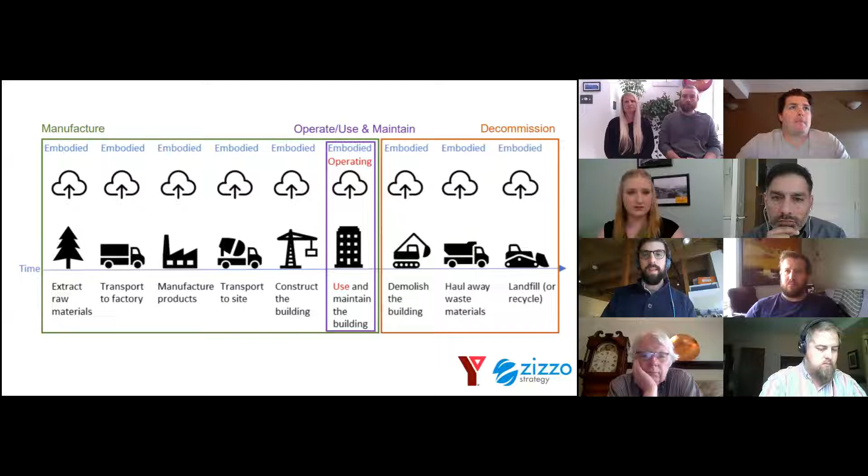And to put that more in focus, Architecture 2030, you may have seen this graph from the Embodied Carbon Network and others, found that annually embodied carbon is responsible for about 11% of global greenhouse gas emissions and 28% of the global building sector emissions. Now, that's only for new buildings, right?

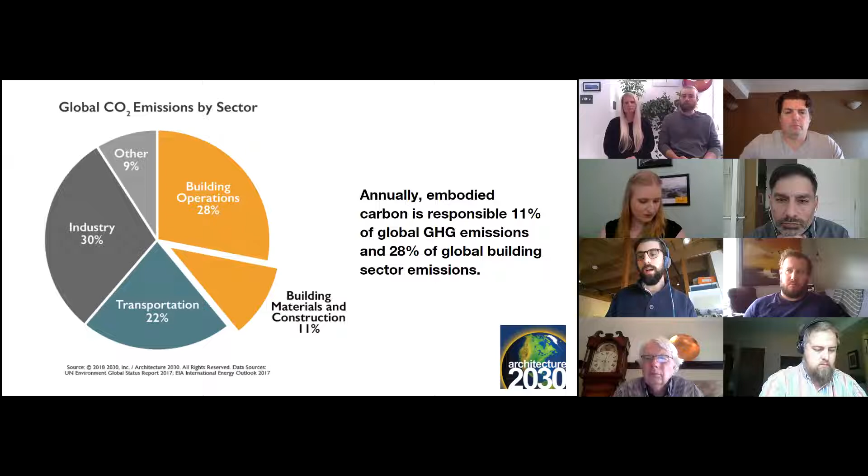If we think about the full scope of global waste emissions, and I think you'll hear more from Faisal from the City of Vancouver about that, it's a non-negligible part, right? It's not the same as stationary emissions or transportation emissions, for example, but it's meaningful and something we need to be accounting for in our emissions reduction strategies going forward.

The second piece is, of course, the materials themselves. We extract a phenomenal amount of materials from this planet, and as cities and other organizations start to think about what a so-called one planet economy looks like, living within the natural boundaries of our geophysical systems, the amount of materials we use just writ large really matters.

So Circle Economy out of Amsterdam does their annual Circularity Gap Report, and this year they found that 28.7 billion, with a B, metric tons of materials are extracted from the planet every year for construction and infrastructure. That's just an astounding amount of material, right? That's the single largest material usage by any sector in the world. And that is growing over time. So we have a clear imperative to reduce the amount of these materials if we intend to meet a variety of our social and environmental goals.

The final reason we should care is that we have an economy that's significantly implicated in construction and our buildings. And obviously this is why something like the Commission gets involved. I always like to refer to the VEC's work in the green job space. Since 2010, we've been tracking the number of green jobs in Vancouver. And we've seen that number grow 35% between 2010 and 2016, a rate far greater than pretty much any other sector outside of tech in the city.

Green buildings have always been one of the single largest, if not now the largest, pillars of that green economy. We have lots of folks in clean tech. We're a global clean tech player, but green buildings, job for job, are still one of the largest sectors. And we expect that trend to continue, particularly as we adopt more rigorous green building policies moving forward. So there's a clear economic imperative here when we're talking about our built environment.

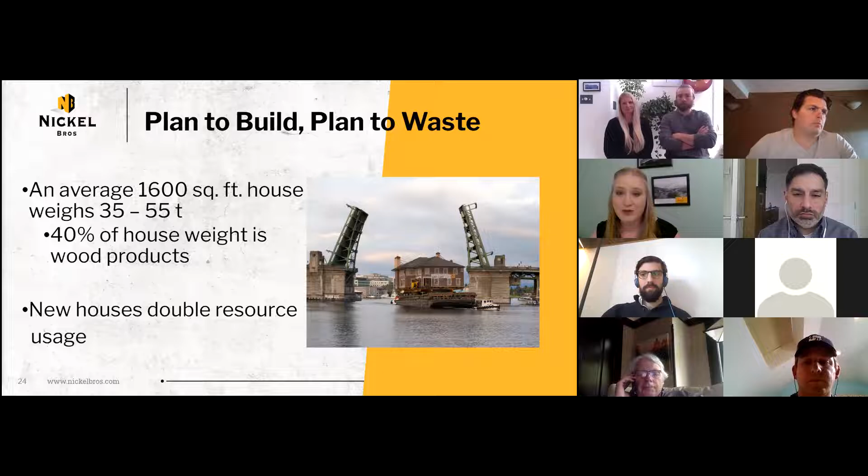People aren't always aware of the actual amount that is in each of these homes that's being torn down. About 3,000 homes were demolished in Metro Vancouver in 2018. So when you think about the amount of wood there that was just torn up and wasted, it's a lot of clean wood.

Over 60% of those homes were pre-1940s homes, so they were built using old growth wood rather than the new growth wood that we have now. And those 3,000 homes created 165,000 tons of solid waste in our landfills.

33% of our landfill waste currently is demolition waste. So 235 of those were classified as character homes, meaning some of those materials would have had to be recycled based on the municipal bylaws.

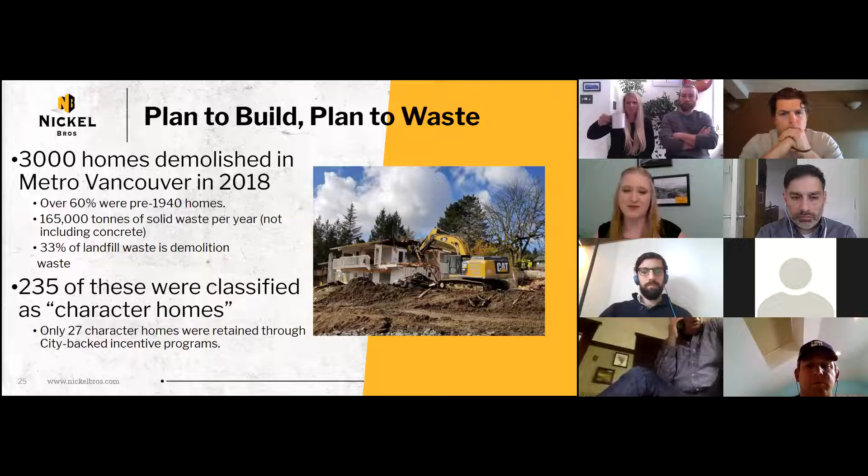One thing I find interesting is that despite all of the programs in place to save character homes and older homes, only 27 of those homes were actually retained through city-backed incentive programs. So 27 of 235 tells me that despite all the progress we're making, there really is still a very long way to go in being able to reuse these materials effectively.

About a third of those homes were actually suitable for recycling or relocation, but either we didn't get a call to recycle or relocate them, or we were brought into the process too late, which is something I'll talk about a little bit throughout today.

But if we had received the call to relocate these homes, we could have diverted 97,500 tons of waste from the landfills within 1 year, which includes 22,000 tons of clean wood. That equates to 41,800 trees that wouldn't have needed to be cut down for 1 year.

We find that a lot of homes nowadays are being deconstructed, which can be a really great option. But I think it's always important to look at the recycling hierarchy, which tells us that reuse generally should come before recycling. So when you look at a deconstruction project, deconstruction on average only reuses 20% of the materials they're able to salvage.

The others are recycled by being used for fill or other processes like that. So again, we really try to promote repurposing and reuse first and recycling last. And sometimes there are situations where we can do both.

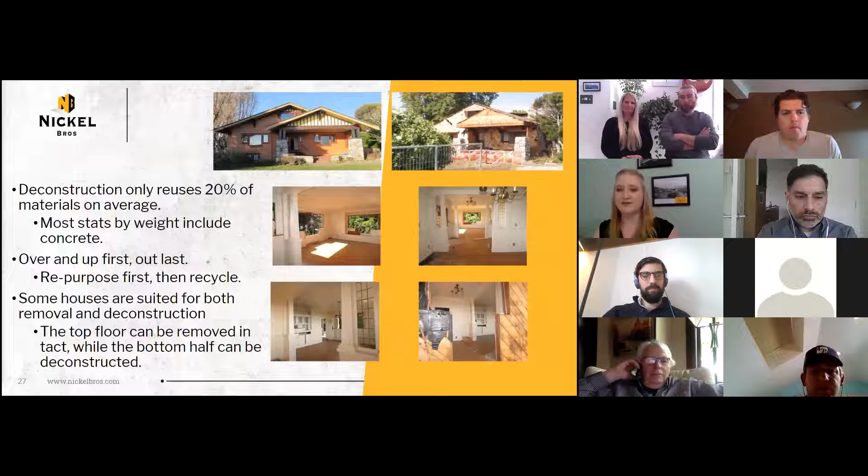For instance, in Vancouver we have trolley lines, so if it's a 2-story home, we often can't take both stories due to the height restrictions. So we work with unbuilders quite often where we'll move the top half of the home and they'll come in and deconstruct the bottom half. It's a really great collaboration within our industry to try to save as many of these materials as possible.

Just as an example, to give you a comparison between deconstruction, demolition, and home recycling, this is a home that was in Vancouver. We received a call about it in 2018, and it needed to be moved by the City of Vancouver to actually create park space - it was in the way of where they planned out their green space initiative. So that home ended up being moved to New West, and it is a rental property now.

So with that home being recycled, the total cost to recycle that home was about $8,000, and we were able to divert 93 tons of wood or construction waste from the landfill throughout that home's life cycle. By extending the lifespan of that home, we've saved roughly 200 trees, which compared to deconstruction, would have cost around $29,000 to deconstruct that home, saving 90.21 tons of diverted waste through reuse and recycling.

And then green demolition - the thing you have to keep in mind is with deconstruction and green demo, you also need to do all of your hazmat abatement. Whereas with home recycling, that quite often isn't necessary because we don't disturb the materials the same way that lifting them up and taking them out does. So for green demolition, your cost would have been around $33,000, and you'd only have diverted around 69.75 tons of waste from the landfill. So home recycling compares quite well when you think of cost and amount of waste diverted.

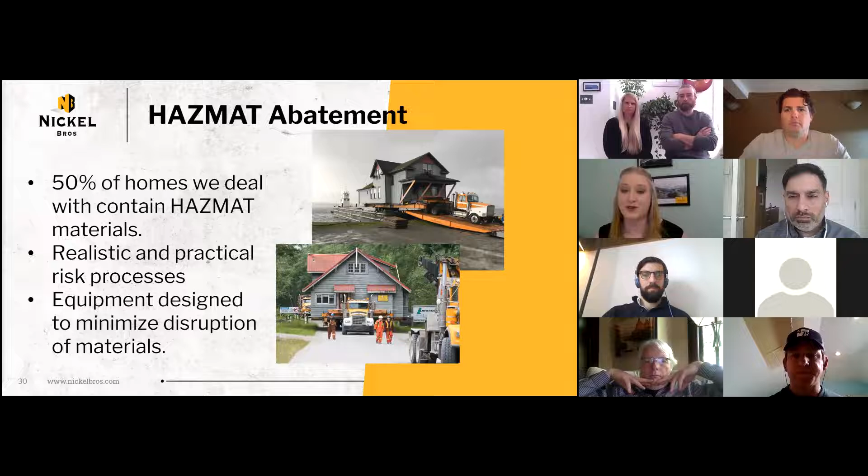So we hear a lot of talk about the circular economy lately, especially from the Ministry of Environment - that's one of their keywords right now. Home recycling is very much a circular economy solution because it does create affordable housing as well. So the average cost to build new in BC is about $200 to $500 per square foot, whereas the average cost to have a recycled home delivered and installed is about $75 to $120 per square foot. And that includes building a basement underneath it if you wanted another floor.

So currently we find a lot of our homes are actually being received into Washington State. We have a few different affordable housing organizations that we partner with there. So you can see this particular development was 12 homes that we moved into the San Juan Islands, and we have another affordable housing development with that same organization coming up.

So a lot of these homes, as I said, contain materials that we can't get anymore. We're not just looking at the value of the environmental impact that we can save through these homes, and we're not just looking at the affordability. It's also the fact that these homes in a lot of cases are - I don't want to say this to offend anyone - but in a lot of ways just more structurally sound than the homes we're building now. They're incredibly solid, they've kind of been time tested, and the materials in them that we're at risk of just throwing away are literally things that don't exist anymore.

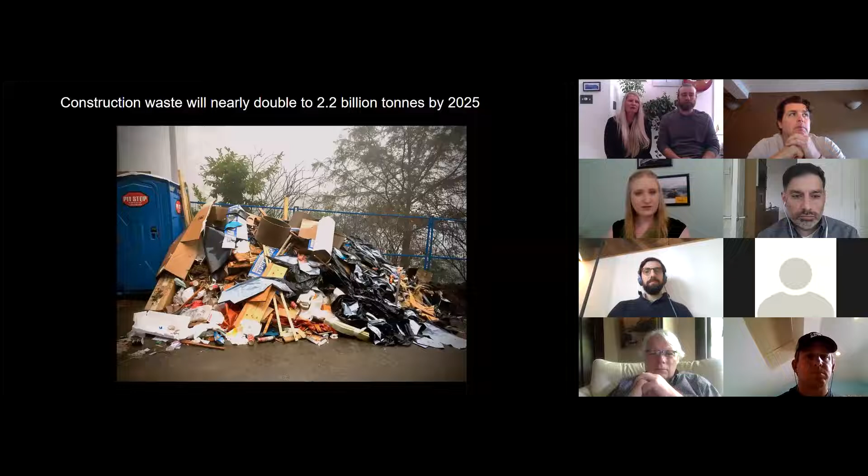The volume of construction waste generated worldwide every year, according to a report from Transparency Market Research, will nearly double to 2.2 billion tons by 2025. If we stand any chance of averting a climate catastrophe, we must start with the construction industry and stop thinking of it in the same way we have been for the last few decades.

Once I started to learn everything that was involved on the waste management end of the construction industry, and after many eye-opening trips to the landfill, I dove headfirst into the business and I haven't looked back. Speaking of the landfill or transfer station, if you haven't been, go. Yes, it's smelly and probably not a great social outing, but I promise it'll make you think twice about what you throw away. But I'm assuming everyone here has.

Did you know that every scrap of so-called waste goes on a long and costly journey after the transfer station? So where does it go? The short answer is that most of the waste received at any Metro Vancouver transfer station goes to the Vancouver landfill in Delta, the Metro Vancouver Waste to Energy facility in Burnaby, and Eco Waste in Richmond. The remainder gets sent to an out-of-region facility, which has over time been trucked to Rabanco in Washington State. Moving all this waste creates a huge carbon footprint. The less we waste, the better for our environment and beating climate change.

Going to landfills and transfer stations has really opened our eyes to the dramatic amount of construction waste that is thrown away. Depending on how they are designed, landfills produce harmful greenhouse gases like methane and carbon dioxide, as well as leachate, which pollutes groundwater and soil. Even with strong preventative measures in place, fugitive emissions from landfills are a concern.

In Canada, according to Environment Canada, landfills are responsible for 20% of national methane emissions. Methane is a greenhouse gas that is more harmful than carbon dioxide in terms of its global warming potential because it traps 21 times more heat than a molecule of carbon dioxide.

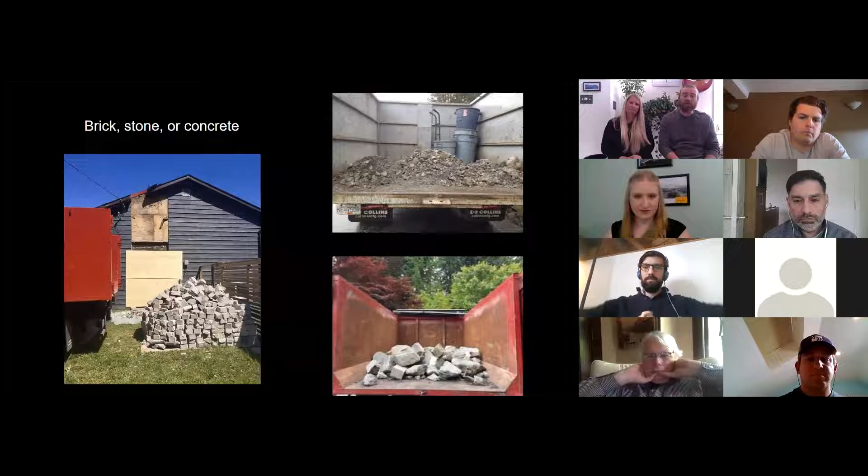Brick, stone, and concrete can get broken down and remade back into the materials they came from and are also used as additives in new products. Did you know that up to 80 million pounds of used carpet and underlay are sent to Metro Vancouver's landfills each year? Carpet can be recycled, reducing the need for oil to produce new carpet and underlay. The Coquitlam transfer station is now accepting carpet as recycling, and so is Pack Recycling in Richmond.

Large amounts of metal can get taken to either the metal recycling scrapyard or the general metal section at the transfer stations. Pretty easy to get rid of metal. Packaging is huge in the construction industry. Fixtures, electronics, furniture, appliances, you name it, whatever goes into a house usually comes packaged in cardboard. Cardboard is one of the easiest items to recycle, but that being said, if there's a large reduction in the amount used in the packaging, that would be beneficial by reducing our carbon output as well.

Did you know that plastic can take up to 1,000 years to break down? Plastic waste takes way too long to decompose. Because styrofoam is so well known for being a major drain on the environment, it is luckily disappearing from our everyday lives, but not quickly enough. We still use foam cups for hot beverages, takeout containers, and we still receive foam padding in the boxes of large appliances. Styrofoam is made of polystyrene, a petroleum-based product, so it is not remotely sustainable. It does not biodegrade, meaning it takes up space in landfills or ends up in our oceans.

Mostly every transfer station or landfill has a great setup for common soft and hard plastics, including styrofoam. The hard to recycle or headache or hybrid plastics are plastics that are found on construction sites that cannot be recycled at local transfer stations or landfills. These are EPS, foam sheets and blocks, black foam, thicker green plastic banding, as well as black or white strapping. Any plastic that has dirt or paint on it is also deemed garbage.

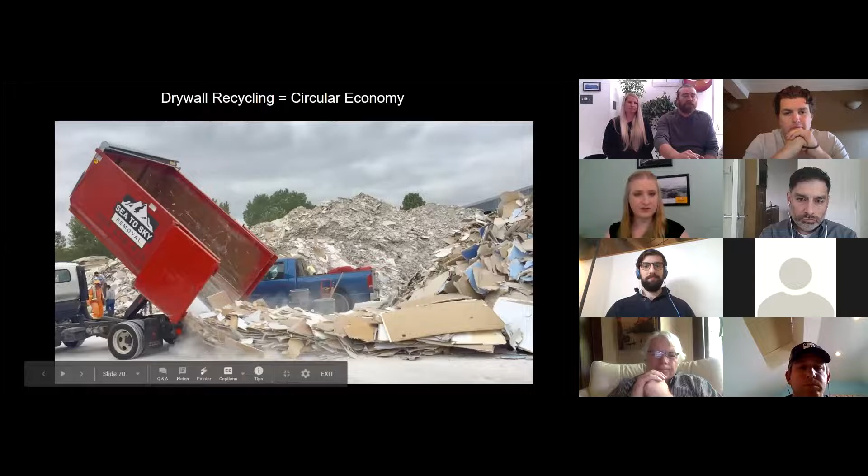Gypsum, or drywall as it's commonly known, can essentially be recycled forever with no degradation to the material. Gypsum facilities keep the material in the supply chain, reducing the need to extract virgin material, which helps to preserve valuable natural resources for generations to come. We've seen great progress with there being a complete ban on drywall disposal into our general landfill debris. Contractors and the public have been forced to dispose of this material correctly, and the results have been outstanding.

It's beneficial to deconstruct your projects properly so that the materials will end up in a usable condition to donate and won't end up in the landfill. Squamish Rebuild, a not-for-profit, has diverted 900,000 pounds to date from the Squamish landfill just by receiving reusable building materials and reselling them to the community. There's a huge opportunity for these items to be reused, and this diversion rate is such a positive result. In a perfect world, every community would have a space dedicated to selling or donated reusable building materials.

You can donate any reusable building materials such as windows, doors, lumber, plywood, light fixtures, appliances, furniture, sinks, cabinets to not-for-profits such as ReStore, part of Habitat for Humanity, Urban Repurpose in North Vancouver, Whistler Rebuild It in Whistler, and Squamish Rebuild in Squamish. You can even reach out to schools who want to practice building with these materials or connect to artists who will create something beautiful and thought-provoking from your waste.

Between January 1st and October 17th, 2019, 521 black bears were destroyed due to mismanagement of waste. When it comes to keeping a site clean and green, we always need to be aware of the critters who coexist around us. We always recommend an actual bear-proof bin for organics, which is able to be locked and can be rolled away and stored safely during the night. This allows the organics to be disposed of properly, allowing them to go back into composting and ultimately turn back into usable soil. But the easiest thing you can do with food waste is pack it in and pack it out.

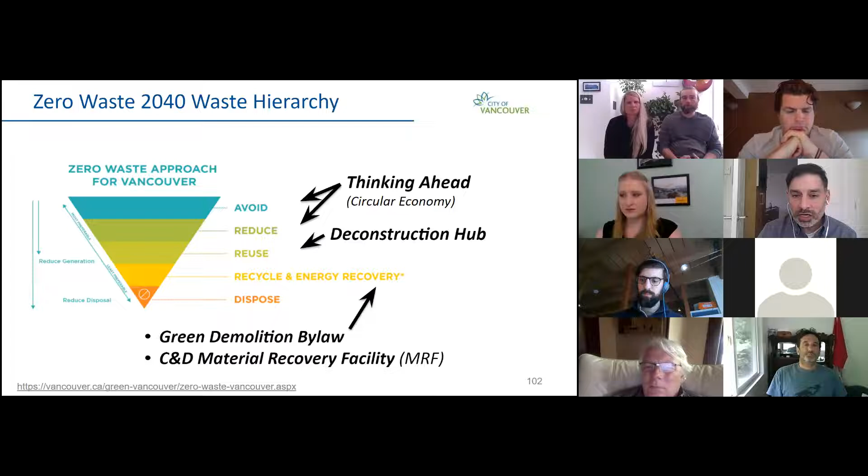The zero waste hierarchy is very similar. This is the one that actually comes out of our Zero Waste 2040 plan. The thinking ahead is more on the avoid and reduce, as it relates to companies like Nickel Brothers and Sea to Sky. In terms of reuse, and below that, these are the kinds of things that we're working on as well. But obviously, we want this stuff to reduce so that we can be higher up on the waste hierarchy.

There's definitely a case for thinking ahead. The best reuse is to reuse the whole house. So definitely a shout out to Nickel Brothers. Really excited about the work they're doing. I had no idea, just watching the presentation, of the great stuff that they're doing, and just thinking about the logistics of getting these houses moved. Also, with Sea to Sky, I did a panel a couple of years ago with Sea to Sky and Chris.

And just the fact that they go into the garbage bags is fantastic. Just a little thing, like we did a pilot plant at the Vancouver landfill to just do some shredding, and we couldn't even touch the waste. We can't touch it because we deal with thousands of tons every day. But we know that there's a lot of little things in there that definitely could be reused. So just a shout out for them as well to really get their hands dirty in that.

And just their passion. Being in the position we are with the City of Vancouver and within Metro Vancouver, we definitely can be a leader to influence change throughout the world too. Deconstruction is the next best thing if you can't move the house. And why is because of health things: demolishing a house in terms of noise and dust is not good for the environment and not good for the neighbors as well.

Adam will definitely attest; he's told us stories about neighbors around a house that's being deconstructed versus being demolished. Demolition tends to breed aggressive reactions, whereas deconstruction brings more of a community together and a motivation to try to reuse as much of the wood as they can, as close as possible to the house, if not within the house, maybe making some cool furniture or wall or flooring as well. So happy neighbors, and then embodied carbon as well.

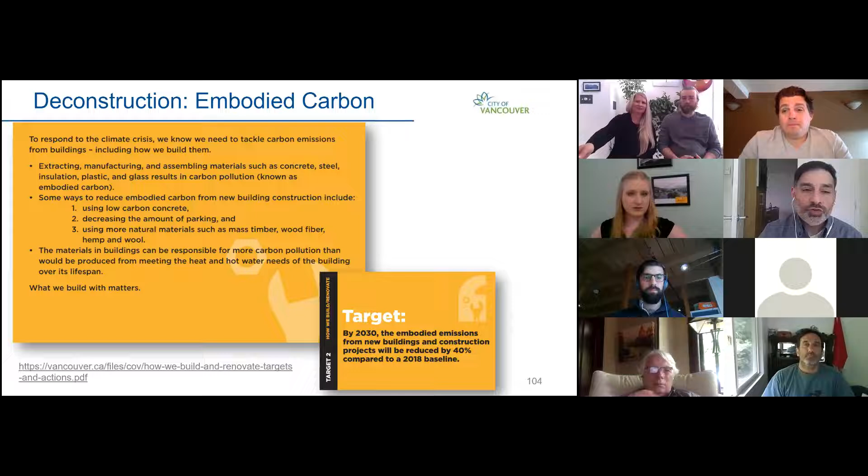One of the other things that we're working on is the deconstruction hub. We went out to market to provide $250,000 to a company that could leverage its infrastructure to take their selling of salvage wood to the next level. And I'm allowed to announce that it is Habitat for Humanity, who's working closely with Unbuilders. So I'm really happy about that. Because of COVID, we never got a chance to officially announce that, but it is public. So you heard it here first. We're really excited about that. And the money will be used to get them to the next level on selling the salvage material.

What that involves is when a house is being deconstructed, an appraiser, such as Unbuilders, will come to the house and appraise the wood for its actual value. Then when the donation goes to Habitat for Humanity, it qualifies for a tax receipt. And Adam is working on some really cool things about how to make the tax receipt timing get closer to the time of decision of when the house is being deconstructed, so that they can see that savings quicker.

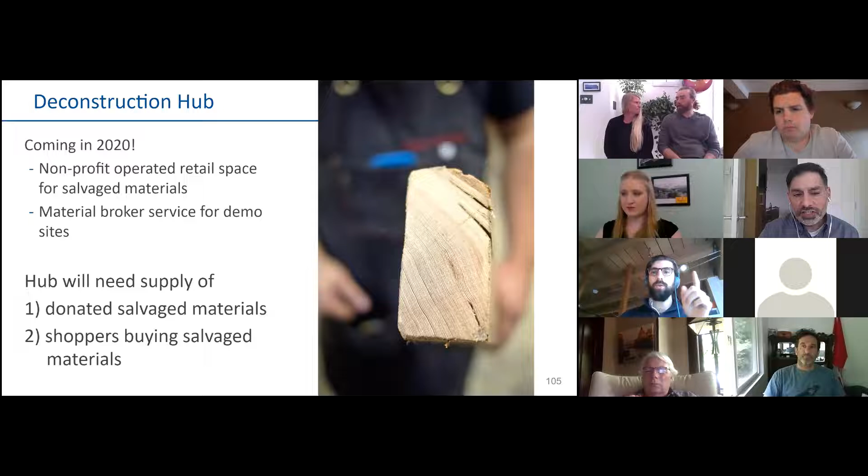Portland is a municipality that we look to a lot, and on May the 19th there's a webinar that we're working with, and I definitely advise you to catch that, where Portland will talk about some of the successes of how they've gotten such a great market and marketplace for this salvage wood material. We haven't really got there, and I'll mention why later on. Sorry, can you just say who's hosting that webinar? Oh, the National Zero Waste Council is hosting that webinar. Thank you, George. And this hub will take the donated salvage materials that have been appraised by a professional, and then shoppers will buy that salvage material. We just want to elevate that and get it more up and running.

There's some pluses and minuses of that, and one of them is definitely market. Definitely there's a policy part as well, but the markets in Vancouver, they're just not there yet. But I'm really hopeful from what George was showing with the 5 different markets that were created as a result of the STEP code. So I'm hoping that will transfer to this as well.

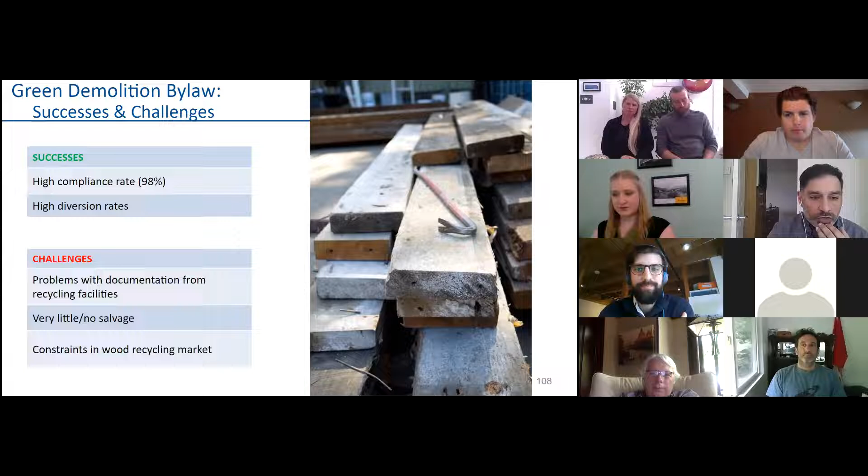But I'm hoping that with this, just what George told me, I've been really inspired to try to find those catalysts for markets so that they can start to take that on, so it can take root and actually accelerate. So yeah, there's very little and no salvage on some of the properties as well. And then there's just constraints, like what we said, with the wood recycling market.

Things that we want to do are, we want to expand the green demo, but again, there are limitations with respect to markets and what's out there right now. But we are seeing a lot of promise, and seeing companies like Sea to Sky that are so passionate about what they do and finding that value, I'm really hopeful for the future on this.

But for planning for the end of life, sorry, my slide is covered by all of your faces here. So planning for the end of life at the design stage and looking at the life cycle and embodied carbon and then designing for deconstruction is really important. As you know, a lot of these permits, and I am very aware that the City of Vancouver has a lot of hurdles in its permitting process.

Like it or not, the demolition or the deconstruction of the home, for most developers and contractors right now, is not at front of mind. It's like, get it down. We waited for months to years to get this thing. Let's get it down. So we have to kind of manage that as well. And really happy to see that the city is looking at how they can accelerate permits as well.

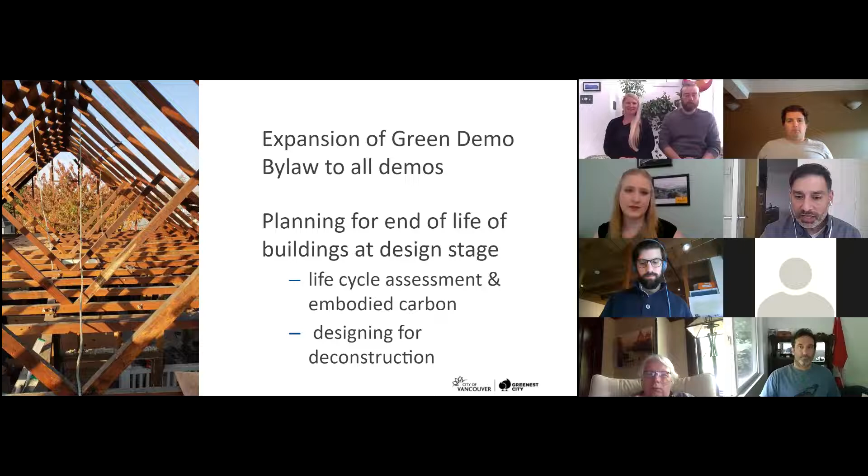And then in conclusion, I want to leave this with you: what are the opportunities so that we can think more long-term about our materials? And then where can you influence your material flows?

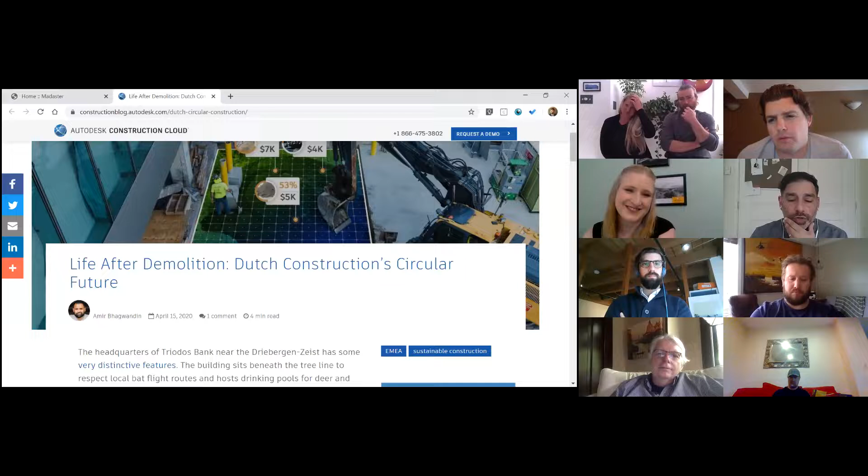I just wanted to chime in here. I'm calling from Monroe, Washington, outside Seattle, and we're currently working with Nickel Brothers. We have 2 historic homes, they've named them Hattie and Harriet, beautiful historic homes currently for sale. The owner of the property is planning to build apartments, and luckily we knew about this early enough so that we have lots of time.

They're not going to be dealt with until September, so hopefully someone will be able to move them. Currently dealing with a lot of people trying to do that. I just wanted to thank all of you for the good work you're doing. Our Historical Society is very active in trying to preserve beautiful old buildings and repurpose them. The upcycling is something we all believe in strongly, and the community grassroots feelings about these projects is there. People have just come out of the woodwork to say thank you for trying to save these buildings. The public support is unreal. So thanks to all of you for the work you do. Everyone loves it, and we hope we can save our 2 houses.

Tammy, I noticed you had a question about whether those homes could be part of the San Juan development. I think the challenge we're having with Hattie and Harriet specifically is that we don't have an easy barge location to get them to. So we're trying to look at them as though they're a little landlocked and find somewhere close by that they could be road moved to. I'll definitely mention it to Nick and see if that's an option if we had a specific place for them to be barged to, but I think that was the challenge we were having with that idea.